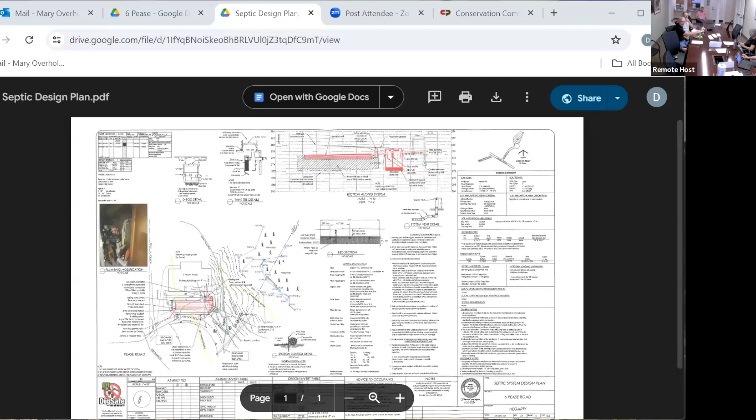Found another route. All right, well here is the septic plan for 6 Pease. Okay, this is a septic replacement.

Let me see if I can see this better, do it on here. Six Pease Road is surrounded by wetland actually, so they're going to put the new septic in front. There's really no issues with it, there's no other place they can put it, they have erosion controls, so that's fine.

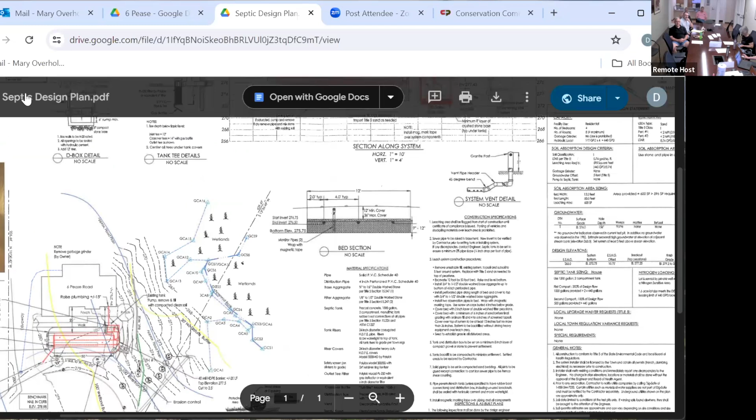6 Pease has Center Brook coming down on this side, and then this side is a perennial stream that goes into Center Brook, so the property is pretty much surrounded by wetland on all sides.

The septic system is, to review, was this a replacement? It's a replacement, okay, yeah. It's going in the exact same spot? Pretty much, yeah, they have to, obviously, make it bigger. Yeah, that's how it works these days.

The septic is approximately, the closest point to the wetland is 60 feet away. The majority of the leach field lies outside of the 100-foot buffer, but because there's a riverfront area, both for Center Brook and for this tributary, pretty much the whole property is within riverfront area, so there's not much you can do about that.

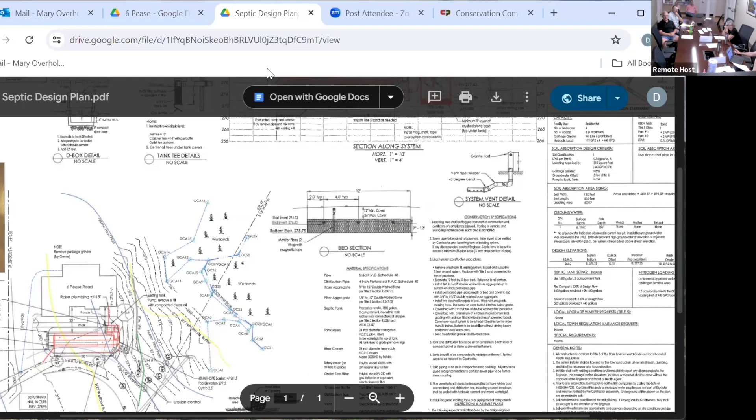My only real comments on this one, and I'll bring up my report, is that there's some—and obviously I feel bad for the people, there's no place for them to put their brush or anything—so they have been putting some brush in the wetland. Here's the house, septic is going in front of the house.

They did a notice of intent 4 years ago for putting a pool in, and that's done. They have a nice map of the property on the notice of intent. Here you can see it, and so they have actually a lot of grass. Here's Center Brook on this side, and here's the unnamed tributary.

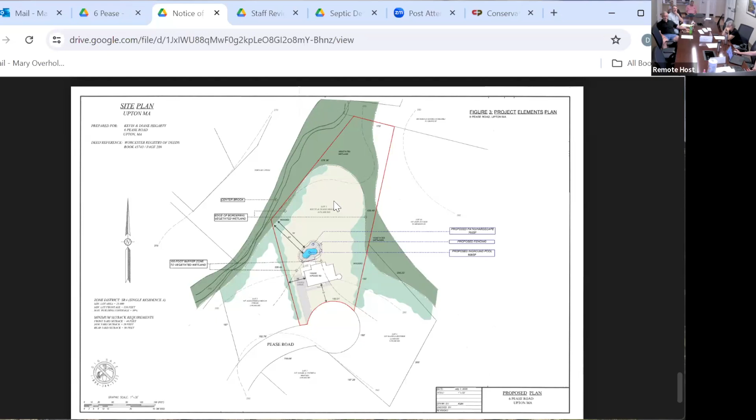This shows the wetlands and the floodplain, so they don't really have a lot of space to be putting stuff. But if the house is being sold, this was built before the bylaw, so they have lawn pretty close to the wetland. If the owners would want to consider putting bounds, you would have to put a lot in, it would go around the whole thing. The septic is going in front, so that is something the commission could consider. Maybe it's a large lawn, it could be a little smaller. How do they feel about making their back a little smaller?

I don't know, and I'm not sure. They don't have to make it small. No, they don't have to. They might, out of good will, you know, if they, because they do have a relatively big yard, as you can see, some of the neighbors have much smaller yards.

But the septic is in front, and the rest of this is really not related to that project. Yeah, well, they have enough for brush, I guess that was the thing, yes. They can store the brush they make on their little lawn area. They can just pull it out a little, towards the back. Where is the green, the 30 foot buffer?

Let's see, this is the green. I'm not actually sure in this plan. Oh, there's Marcella, she made it. Let's see if I can mute you. Yeah, I have a question. Am I correct in seeing this, that the lawn extends into the wetland?

This is the notice of intent plan from 4 years ago, which I did not review very carefully. But certainly that one area, I showed you the picture, I think I took it right about here, where the stream is literally right next to the lawn. I did not do soil samples within the lawn area. There's definitely, and I'm not sure if they flagged the whole thing, they flagged along here. I didn't look at this side to see what was flagged. But certainly the lawn goes within the 30-foot buffer, the 30-foot no-disturb zone. And as to whether some of the lawn may be wetland itself, I didn't look at that very closely.

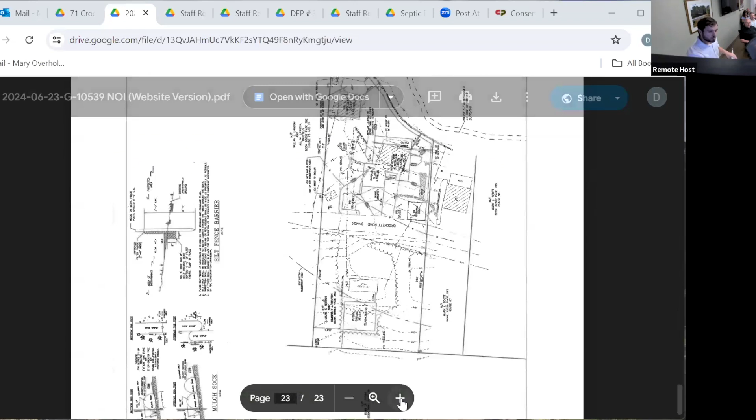Understood. So to recap, we went from a lake setback of 22.2 feet as previously proposed. Currently, with some extra jogs we were able to put into the footprint and some additional shifting of the footprint, we were able to get a total of 25.1 feet off of that lake edge.

In addition to that, we are proposing currently 3 areas for some additional landscaping and naturalization along the waterfront. The linear feet for those locations will total 55 feet, or about 37% of the total frontage along that property.

And then our plan did add in a construction entrance as requested. We are also showing some additional landscaping features, particularly 3 large, beautiful trees along the lake edge, as well as some existing screening and tree line along the northern property line, just to help illustrate that the site won't be fully bare or completely grass throughout. Around the building footprint itself we have a couple locations shown where we'll be proposing some landscaping. That hasn't been fully finalized yet, but I do know the clients will be adding in other types of plantings as they get that finalized with their architect and builder.

I had a question. It looks like one of the areas you're proposing to have natural vegetation is near the shed. Is there already natural vegetation there?

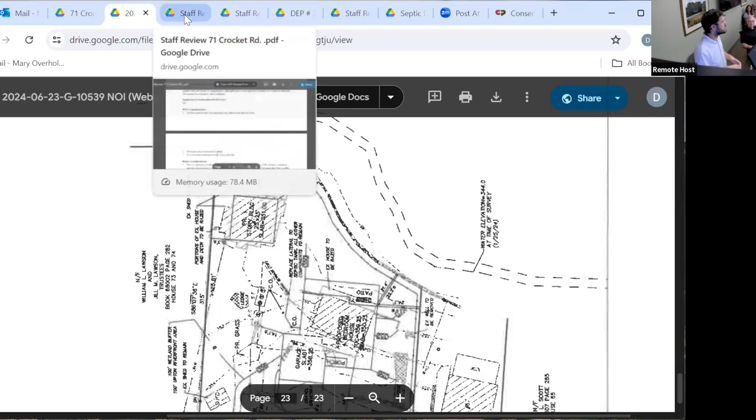As far as everything on the site goes, there already is grass throughout the whole area, but particularly we were calling these out as naturalization areas. I don't know if you might require a specific type of planting there, or if you're just looking for something like extra shrubs. But if I have to expand that area a little, I can shift that if there was some existing stuff. Primarily it was going to be going around this tree area, and then I believe there was one other tree that could possibly be hidden by this one or this one here.

So John, I can jump in and answer Mary's question. There is a third tree on the water side of the shed, in front of the cottage, and that area is already natural, or kind of natural.

Did that help, Marcella? Do you want to see the plans? A little, yes, but I just wanted to get more of a visual sense of going from 20 feet to 25 feet, or I think it was 20 or 22 feet. That's current, and I just wanted to get a sense of what that looked like.

I don't know how much we discussed it last time. I think someone did mention that more of the area right along the water be allowed to be naturalized, converting from lawn to something, maybe some plantings, but just not mow it. Is that something that's on the table?

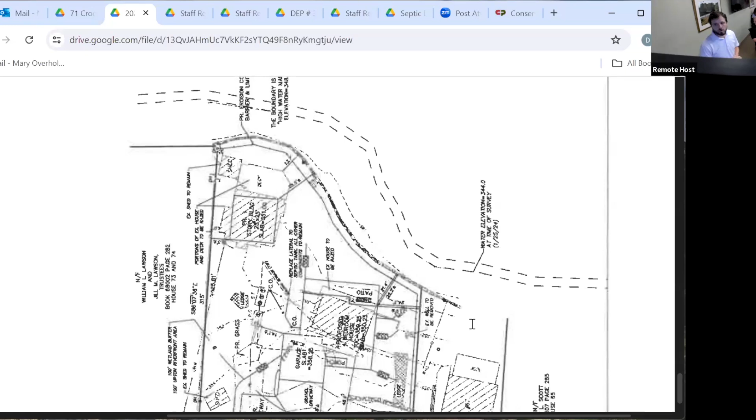Yes, that was the approximate 55 feet that we were proposing, primarily in front of the proposed accessory structure. But if we did need to add it in a few other areas, or break it up a bit, I'm happy to review that with the clients and get a copy back to Mary. Right now we were proposing to naturalize about 37% of that total frontage along the lake.

Okay, thank you. I think sweet pepperbush was a good plant there.

This is Chris. I have one comment, because at the last meeting someone mentioned that in the future there might be a proposal to put a garage somewhere. I was wondering if a box could be inserted where the garage could go.

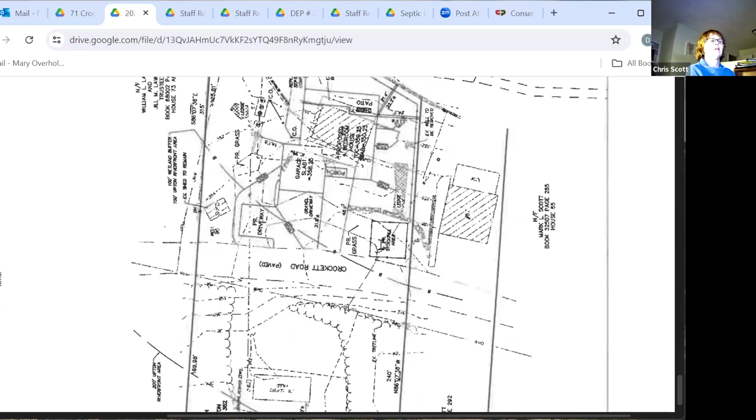So we do have the future garage proposed on the opposite side of the property. In terms of location, we are aware that we will be having to get variances through ZBA for that, as well as for proposed structures on the main side. The setbacks we were dealing with are primarily the ledge right off of Crockett Road, and the existing septic system, having to maintain anywhere from 12 to approximately 20 feet depending on elevation where that garage was falling. Also, if there were to be grading for a future driveway or a stabilized type of driveway, we wanted to make sure we had space to make it gradual enough to be accessible, since it comes up relatively quickly from the edge of the roadway.

So that is proposed in the far back portion of the property. There is a small portion that clips the 200-foot buffer, and we may have to do some clearing of trees there. But I'll let that sit with Mark and Kim on what their exact timeline would be if they ultimately do want to go through with the garage.

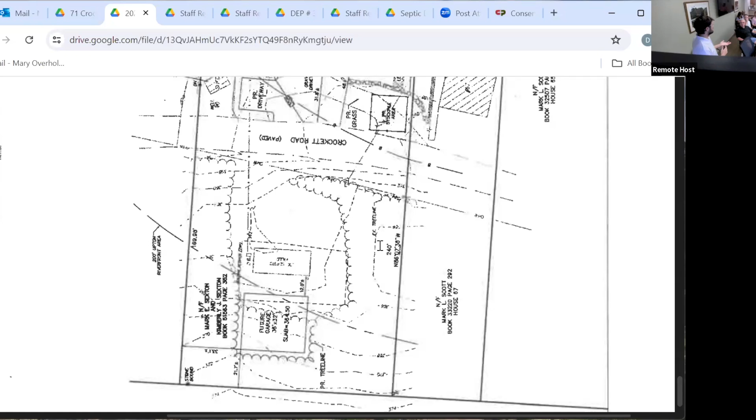And I know I didn't cover it with this plan, but if anybody did want me to show the existing conditions exhibit or proposed conditions exhibit, where it might be a little cleaner to see, I can do that as well for anybody in the audience, or the folks at home.

Okay, thank you. I think they've addressed, from my perspective, most of the comments, aside from it would take a big deal to move the house further back, but the house is basically pretty much in the same position.

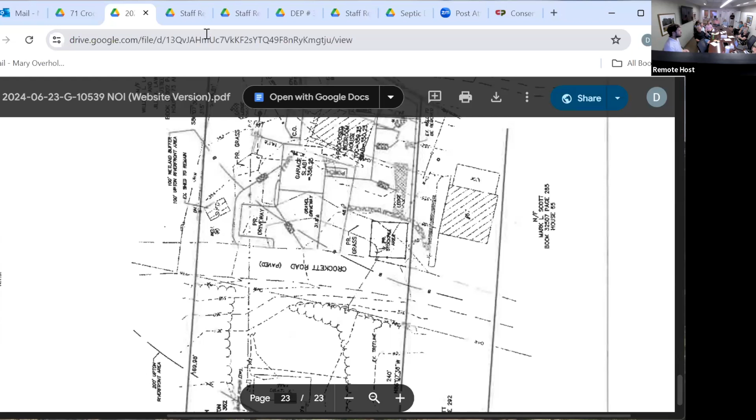The old house is about 25 feet from the foundation, and then you had moved it a little closer. And then if we count the deck overhangs for that accessory structure, the closest point was about 13.7 feet. So there's going to be substantially more green area for filtration and grass area naturalization than what's currently on the site.

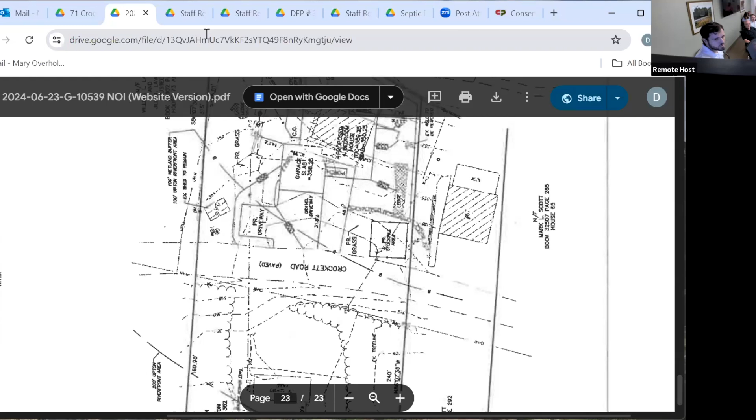Also, at least on the upper side by the road, we're going to be cutting down substantially on some of the gravel area that's up there. Everything through here is proposed to be returned to grass. Anything in this section will also be restored back to grass. So there's a lot of additional improvements just outside of the building setbacks itself.

One thing to add, which may be interesting to know, is the water level on this pond is controlled by a dam, so flooding would be minimal. I believe when the survey went out for the site, the water level was about 344. I know they did pick up a high water mark out there, around 348.5 or so, which falls right at where the wall is. All existing grades on site above the wall are about 350 or higher, so I'm not anticipating any issues.

Thank you. Are there other questions from the commission, the audience, or the applicants?

Mary, is there anything else you feel we need? Yeah, no. The boards, please.

Okay, so for the applicant and the engineer, are you desiring to close the hearing now? Yes, if there are no other questions or comments, we would like to respectfully close the hearing.

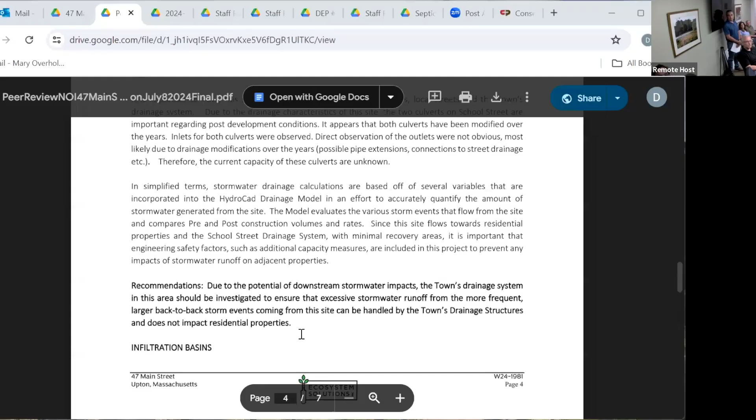That's it, yeah, if you could just raise it up a little. It's not good. That's good, that's good. Okay, good. We have a pointer somewhere. Okay, I can try to use the mouse.

Okay, for the record, Margaret Bacon, I'm a civil engineer and also a professional wetland scientist, and I work for Ecosystem Solutions, and we were asked by the Upton Conservation Commission to do a peer review for this project as it pertains to the Wetlands Protection Act.

So basically what I did, I've been out to the site several times, walked the site several times when it was raining and when it was dry to get a familiarity of the site. And in my report here, I just kind of highlighted the areas that jumped out at me that I thought needed a little more clarification.

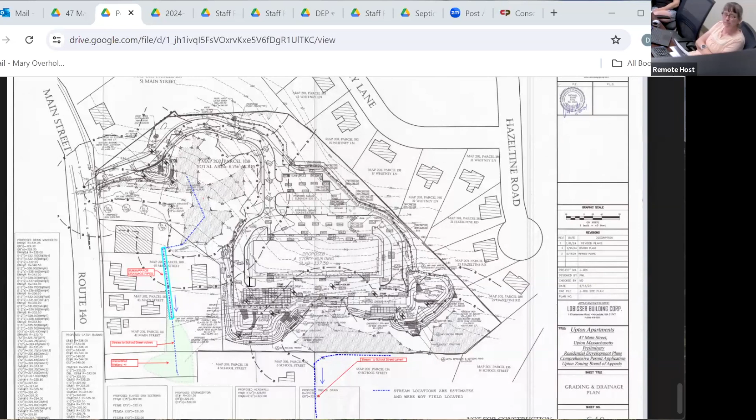So I have a question about the underground basins—how do they get cleaned out? Well, they have manholes before it, and this underground basin is only getting the roof runoff. They have a manhole prior to it, so the water comes in, and that manhole has a sump. That would be sucked out, I would think, with a vac machine. I've never cleaned one myself, but that's what I would think.

We've actually had the pleasure of having to do it. It wasn't our own—we were tying into an existing Walgreens property, and they had never maintained it. We had to bring in a vac truck company that came in and did what Peter said, they went down through the manholes.

And believe it or not, there's someone that goes down into those manholes with the vacuums and sucks it up, but what Peter's saying is...

If you're maintaining the manholes properly, year to year, how does it stay clean? Peter said it's twice a year, like clean. So twice a year they open up the manholes in the summer and they sump it up. If you stay on the maintenance, it catches it, and you don't have to go down.

Correct, but you do have observation ports in the front, so if you inspect those you'll see if there's anything coming in, and at that point you'd work your way back and look at the drain manhole. So anybody walking by could see if it was an issue.

They have to be able to pull up a manhole cover - they're little covers, like a 6-inch cover. Ports, I don't know, yeah, it's ports, 6-inch, it's got metal so you can drive over it, it's H20 rated.

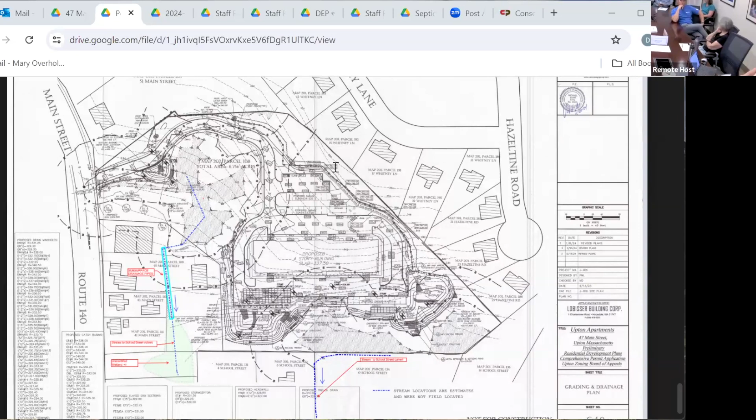And three, earlier tonight the Board of Selectmen had a meeting. I'm not sure if any of you were able to be there, but they had a review of this project proposal by an attorney. To quote the recommendation: 'The significant site constraints, wetlands, make the viability of a 60 unit very challenging, if not impossible, without presenting non-trivial risk to public safety and environmental degradation.' It also says, 'In my opinion, the zoning board has been deprived of peer review, providing a degree of scrutiny necessary for a project of this size, scale, and complexity.' It's an 11-page report, which has serious concerns about this project and the environment surrounding it. So before any decision is made, I would hope you review this with the select board and their concerns from their attorney.

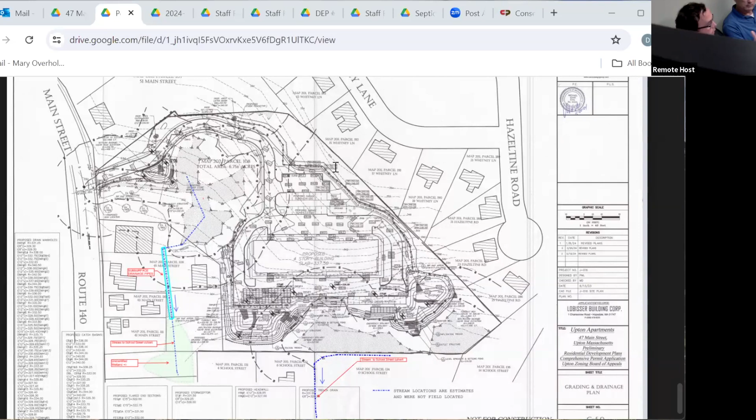If I could just address the snow removal—obviously we're gonna take out a majority of snow when there are major storm events. For minor events we wouldn't take it out. I believe we may have thrown around, Peter, would you say three feet usually? We don't—no, it's very simple. Yeah, it still goes into snow storage. Right, when the snow storage is full, if we have a back-to-back storm and it starts to take up parking spaces, snow gets removed. That's the reason why you have snow storage. Right, so that would be what we would do, as kind of standard for the sites.

I guess the other thing with the letter—yes, the select board did get that letter tonight. We will kind of deal with that for the ZBA. It doesn't have much of an effect on what we're doing here for Concom. The letter kind of goes into some architectural parking things, so obviously welcome to read the letter, but that's our feeling right now. It was just released tonight, so.

Yeah, that's an opinion letter. I think that's a little bit outside our purview though. Yes, I haven't had a chance to look at it, so I don't know. Yeah, okay, none of us have seen it.

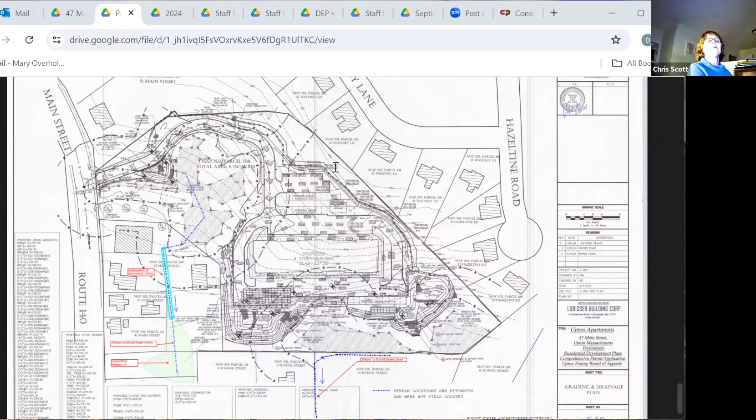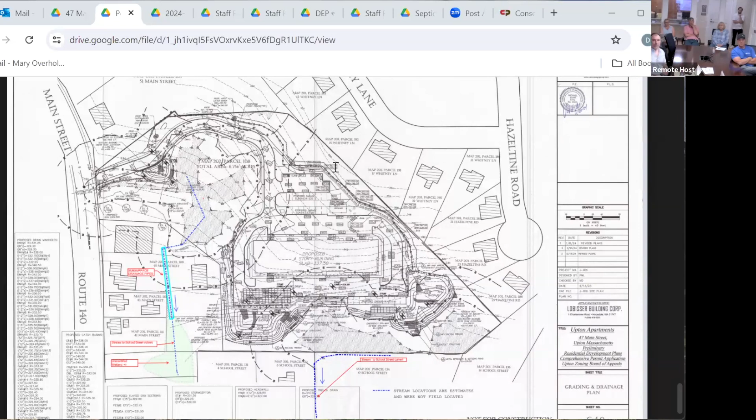Any other comments, Mary? We have Marcia, and actually was that Mary Ellen for the minutes? Yes, Marcia Keselowski. Not understanding how the snow storage area works, but this whole area is elevated and there's wetlands below. So if you store the snow and it melts, or if there's a rainstorm, that's gonna wash salts and road chemicals into the wetlands. Or is there a way that this water's captured? Yeah, Andrew, you still on? You want to talk about salting and how it relates to wetlands? We had talked about this before.

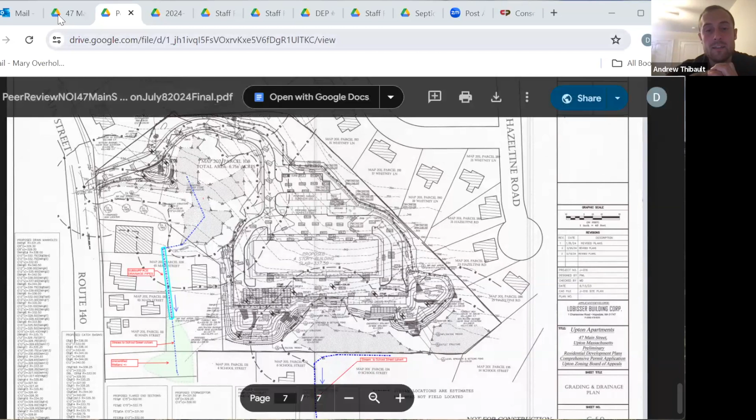A lot of this is primarily with the stormwater system itself. I don't have the snow storage plan up to see exactly where they are, but the snow storage locations are typically selected in areas where they can either be pushed or a front loader would be used to move them to points where they're the furthest separation from these wetland resource areas, not pushed up right against them, where any melting would just go right in. The idea is that as water melts, it hits the stormwater system. If it gets to the point where it's in the way and has nowhere to go, that's where trucking off site comes into play.

Be on the landscaping plan, Mary. Yes.

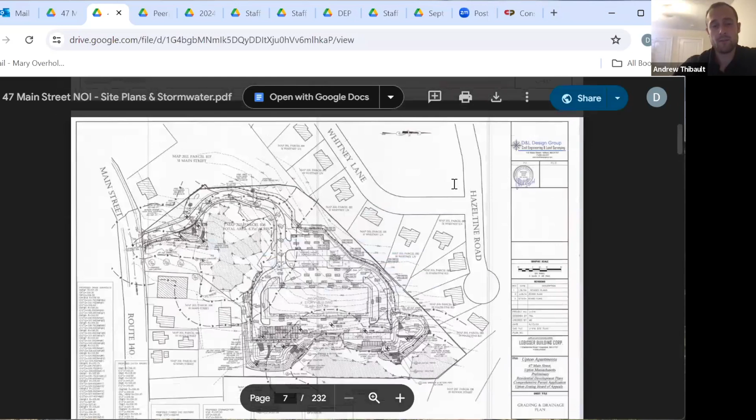We purposely kept all the snow storage outside the 30-foot buffer zone to make sure they're furthest away from the wetland. That further goes to the point that although this project is not bound to the 30-foot standard, that is a reason why Upton has that in place in their wetlands protection bylaw - if those areas are put within 30 feet, that becomes more of a reasonable concern. But this project, although not bound to those standards, still included that in the design and layout just to find the best areas for the project as a whole and to comply with the bylaw where possible.

It's up to the details. After the details. Yeah. This one is, yeah, yeah.

Right, so that shows the snow storage areas here.

It's also worth noting that the typical goal with these is to find areas where there is an existing tree line as well. So what we see here is it's not parking lot to wetlands - we keep that natural forested buffer to the extent possible on a property. That helps with water quality as a whole, as well as giving the furthest separation possible between the development and the wetlands. That squiggled line you see along the edge is the proposed tree line to remain as part of this project.

Any other questions or comments from the audience or the commission?

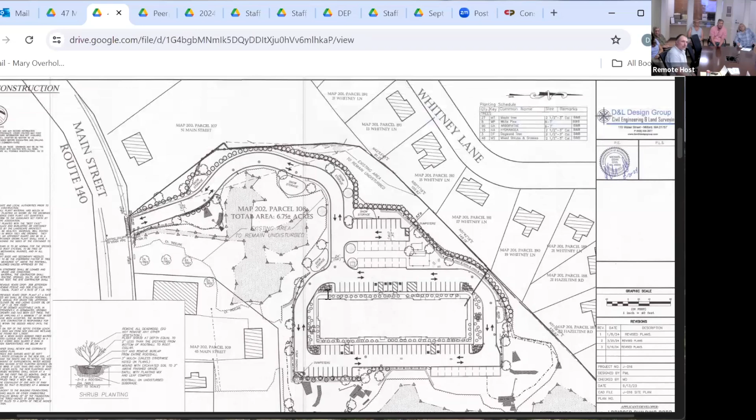Or Mary? Okay, so the infiltration ponds and the maintenance schedule - the stormwater management guidelines from the state say you have to be able to get a vehicle all the way around your retention pond to do the maintenance on it. Won't that throw you in the buffer zone when you put that in?

No, can you go to the grading plan here? So, yeah, this is it right here. There's a gate here, so you would probably use something small, probably by hand. They would come down here, there's a gate, there's a 10-foot wide space down here, and then a 10-foot wide space around the berm, so you can get into the basin and clean it. As well as here, there's a gate here, you come in, you can go around the top of the basin and maintain all that. So we did provide access for getting into the basin. That's part of the stormwater plan.

You're gonna do it by hand? You can do it by hand or by a small skid steer. You don't need big equipment if you maintain the basins. It's when basins aren't maintained that trees start growing in them and then they just don't work. This is private, so I feel the management company is gonna know that they have to maintain these structures, so they will be maintained. In some towns, basins are forgotten, and then that's when you see trees.

So is there a 10-foot buffer against the one up by the top of the road there? No, there's a gate right here, and then there's a berm that you walk around, so they would just get in the gate. This is only about 3 feet deep, so they're just gonna go down the slope and clean that out.

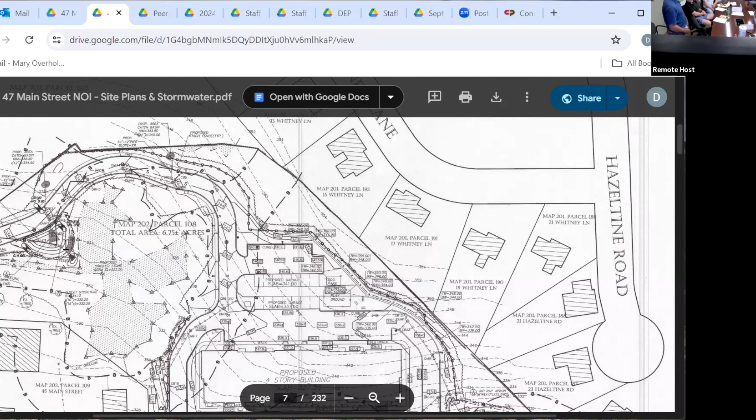So in an emergency, when it is clogged, they just wade in and dig it out? What do you mean in an emergency? If it's clogged and it's filling up - but if they maintain it, it's not gonna get clogged. That's why you have an operation and maintenance plan, that's why you have inspections - we have inspection reports that they have to fill out.

And that will be part of the SWPPP that will be submitted to EPA for their review.

Now, Peter, that is not going to the EPA yet. It has - no, not yet.

Do you have other questions or comments?

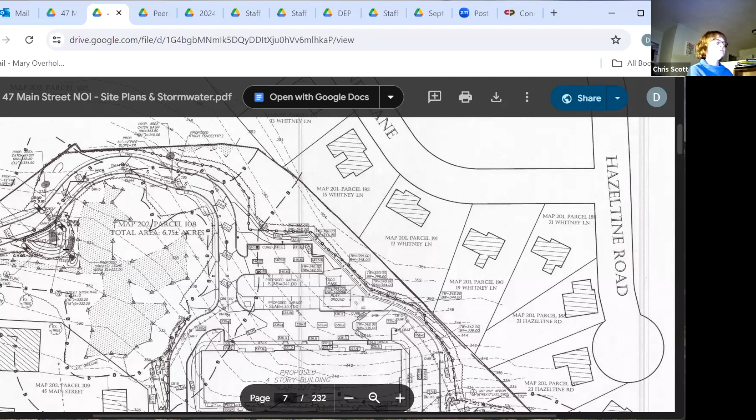Mary, any questions or comments on your part? Margaret, did you have any counter?

I guess my only thought, and it's been my thought since I started this, is we're packing an awful lot into a small space. And I know you have the HydroCAD model, and we use a HydroCAD model to help replicate what we think is going on out there during existing and proposed conditions. So as engineers, you come up with different variables, whether it's the type of soil, slope, vegetation. You put these variables into that model, and that model then tells you how much stormwater you're going to have. Then you can compare the pre to the post. So that's what most engineers use to model developments like this.

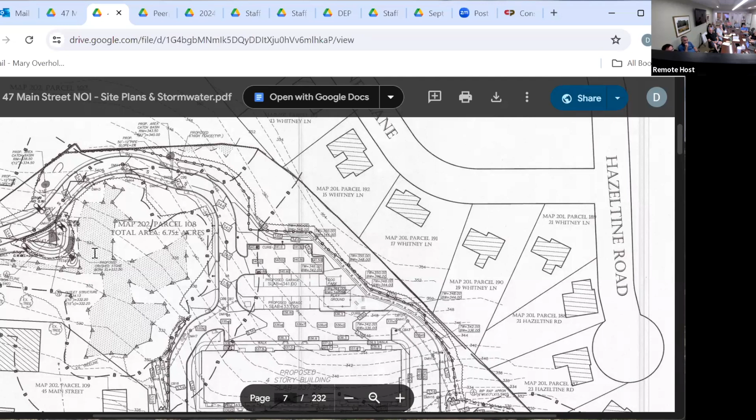But I can only stress that sometimes what if we get it wrong? Or what if one of the variables was wrong? What if we get a back-to-back storm here? Or what if one of these basins, you know, what-ifs happen? I've seen what-ifs happen. So you get back-to-back storms, like you talked about the back-to-back snowstorms, and you get back-to-back rainstorms, and if this thing doesn't drain in time, it'll dump out a whole lot more water than what it's designed for, or if it gets clogged and it's not infiltrating.

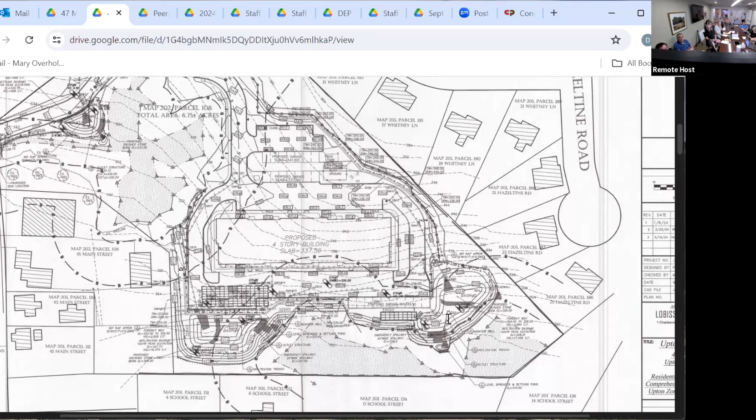My concern goes back down to School Street. Does anybody know how the drainage functions on School Street? For instance, if there was a failure, or we got one of those real big storms and all that water dumps down to School Street, is School Street going to handle it with what they have down there? Has anybody looked at those structures down there, and what do they do? You can look at the inlets, but what's on the other side? They're all buried and go in different directions.

So that's what jumps out at me most for this project, okay? You just want to make sure that you've looked at it all so that you don't have a problem after the fact, or two years after the fact. That, and the buffer zone.

Okay, thanks. And then I'll just respond if you have anything to add after me. I appreciate that, that's completely correct, but we've met with both of those neighbors, so we kind of have a better sense. Kevin's walked the site now four times. We're adding possibly new vegetation, helping out the depression, so we've made ourselves pretty familiar with their backyards.

The other thing, which we've said a few times and is definitely important to stress, is we've gone through five rounds of peer review with the engineer. We've gone through a whole redesign. We can say with confidence there is going to be no increase of flow, rate, or volume off our site. Our hope is we're actually going to make it better by putting these structures here to get the water and filter it, and that is our goal. You can never say never, but we are confident we are not going to make anything worse in that backyard. We've had Stantec, who's been a great engineer, confirm that. So that is kind of where we are.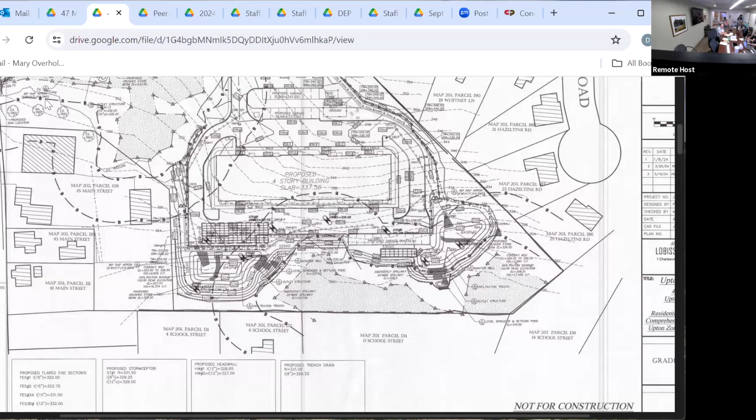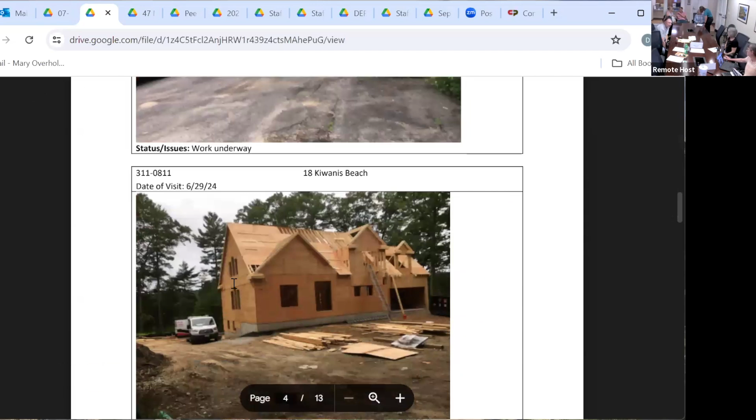Good night, guys. It's interesting that they investigated the restaurant and so on, so I thought in case you were wondering about their findings. Chris said he wasn't doing well, he wasn't able to investigate it. Okay, yeah, thank you. Yeah, no problem.

Yeah, we're worried about our water because, you know, I asked that retention pond question at least 8 times - what happens if you wouldn't get some? Yeah, we could talk to Dennis. It's interesting because the 17 School Street issue has come up so much. I don't think there's an issue, because I know we ran into that with 17. I think he's a little bit further along, but same problem. Sounds like considerable isolation.

Thank you, thank you so much. Thank you, this is interesting. It's very interesting, it really is. I want to grab that. Yeah, people - hi Tom, hi.

Alright, so I think the main thing - I don't know, Chris, it's a little late but we'll continue on - I was driving along 74 Fisk Mill Road, and maybe somebody else remembers, but I feel like we've had issues with this homeowner. So where is that? This is on Fisk Mill, kind of across from where Tyler intersects it.